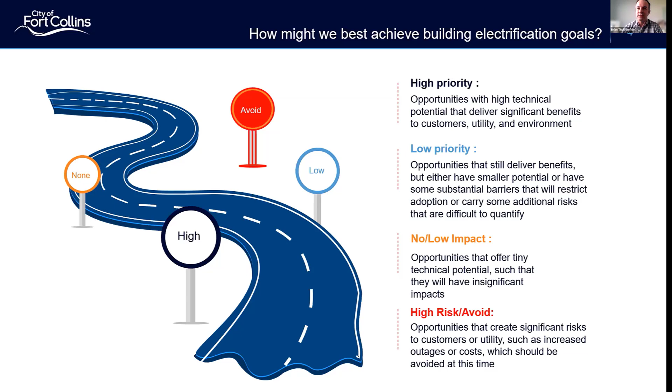I won't steal Justin's thunder much, but in 10 or 15 years we forecast to become a winter peaking utility. We're still summer peaking currently, but how does that change over the years? How does the cost effectiveness of measures get impacted? And what are some of those measures that we want to avoid from that perspective?

So part of the analysis, we cast ahead to 2040 to really look at, in a 100% renewable electricity future, where are our biggest opportunities for GHG reductions? We broke this down into new and existing residential end uses, and through this analysis saw that the biggest bang for our buck is really related to space heating and water heating in the existing building stock. We define that as essentially 2021 and forward being our new building stock.

We're on the IECC 2021 energy code right now, so we have a few other levers to pull when it comes to new construction. However, this framework and this analysis really showed us that we should be focused on electrification measures and programs in our existing building stock.

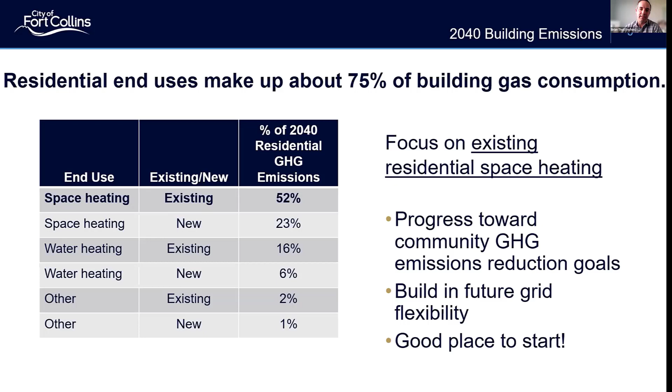This was generally our approach to get us to the place where we want to launch new electrification programs. We did some benchmarking on current electrification programs across the country, and I've learned a lot from our peers along the way. We surveyed our local contractor and customer base on their awareness around heat pumps, and ultimately developed this cost effectiveness framework to help us implement, resulting in some key recommendations for what our program will look like once launched.

I won't focus on the benchmarking initiative related to electrification measures, but before handing it to Justin, I wanted to mention that awareness among contractors was actually higher than we thought. We had a few key contractors that were aware of and did view heat pumps, specifically air source heat pumps, as an opportunity in Fort Collins, and talked about focusing on our customers with solar as a potential target for selling heat pump technology.

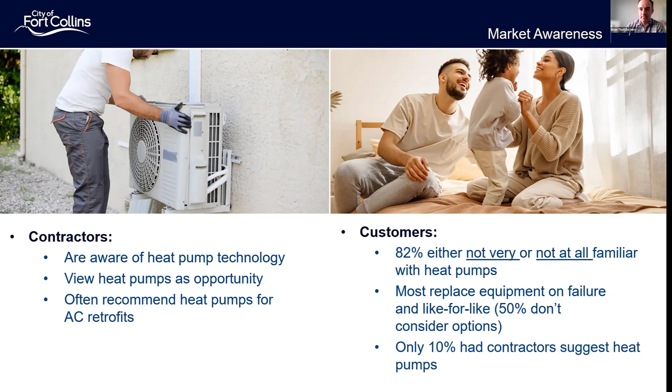Okay, can folks see that okay? Yes. Great. Yep. All right.

As Brian mentioned, this is what we were tasked with: trying to figure out how we might best achieve some of these building electrification goals in Fort Collins. What are we trying to pursue now versus in the future? To do that, we had to try to prioritize different electrification measures.

The problem we had was that building electrification is a little different because electricity consumption increases. We're used to energy efficiency testing where we're always reducing electricity consumption. However, in this case, we're actually going to reduce gas and increase electricity consumption. So some traditional benefit cost approaches just aren't going to work very well in this context.

So the solution we employed was to follow the National Standard Practice Manual guidance for developing a jurisdiction-specific test. We worked with a hand-picked group of stakeholders within the utility to develop this test, and then worked with James at Lumina to develop this JST-compatible, flexible cost effectiveness tool in Analytica, which offers some specific benefits. Here's just a quick overview of this tool.

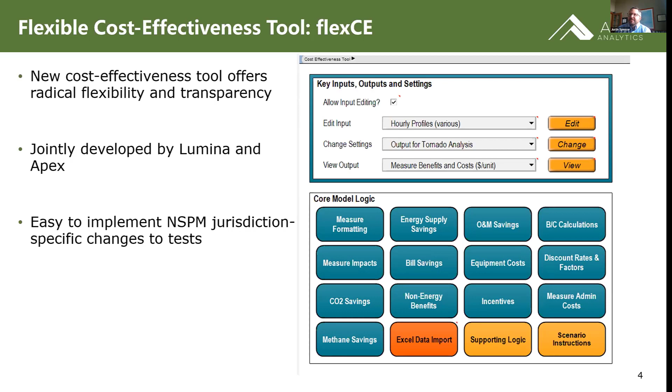In terms of the flexibility, this is an example of how that works. We have this master table within the tool that has all the different cost and benefit streams, and then you can choose for each cost test how to treat it. This was a big plus for us.

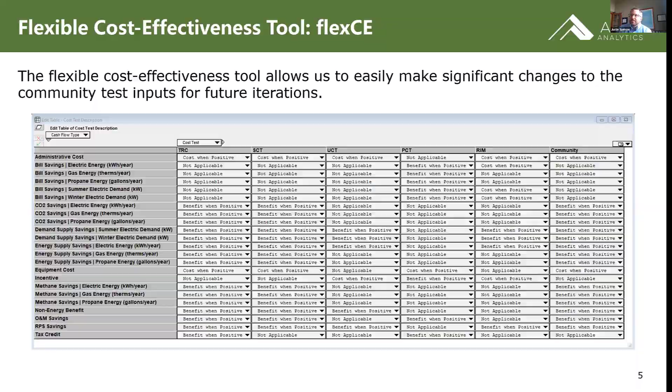First we developed the framework, we developed the tool, then we had to do some modeling of heat pumps, because as Brian brought up earlier, when we looked at the opportunities, it was really all about residential space heating. So I wanted to talk a little bit about heat pump operation and some of what we found there.

For starters, this is a bin analysis of when the loads happen, what temperatures different heating loads occur at in Fort Collins. Fort Collins has a cold, dry, sunny climate in the winter. You actually see the bulk of the heating load happens between 20 and 40 degrees, right in the heart here. Yes, it can get extremely cold, right?

I think the all-time record cold temperature in Fort Collins is 35 below or something like that. It does get to 20 below, once a decade kind of thing, at least in recent years. But as you can see here, the fraction of the heating load actually being delivered below zero is very, very small. That's very rare weather. But when you do get it, you can get a few days in a row where it doesn't even get to zero. Very cold but infrequent. Whereas your typical weather is like a low of 20, high of 50, a sunny day in the winter.

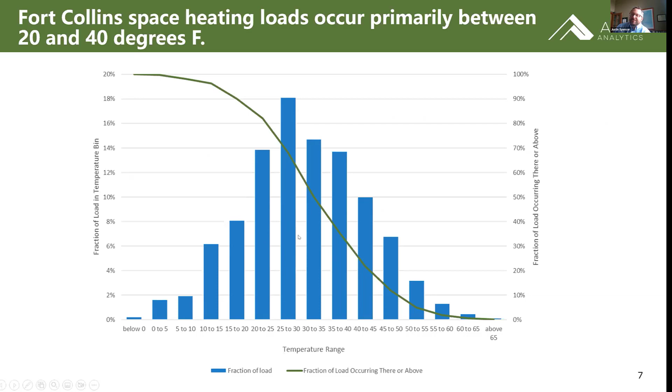So then if we flip back to this distribution here, you can see how influential this is, right? So if I'm heating at all temperatures above 30 degrees, that's about half the load. But then if I'm at all temperatures above 20 degrees, that's another 30%. So now I'm able to meet 80% of the load with the heat pump cost effectively.

All right, do we have any questions yet on any of this? I can't quite see the questions. We're all good. Not yet, Justin. Great. Well, we'll just assume everybody understood all of that. And I explained it perfectly for once.

So then the next really important issue around heat pump operation is just what happens during really cold weather. So how do we keep people warm during extreme cold weather? The problem is the capacity of heat pumps drops off as you get to extremely cold temperatures. So you need some kind of backup, at least in this climate, right? We're a cold climate. One option is to use a hybrid heat pump. So use the existing gas furnace. And you have zero grid impact in that case, right? You have no electric capacity required to meet your heating loads during those times.

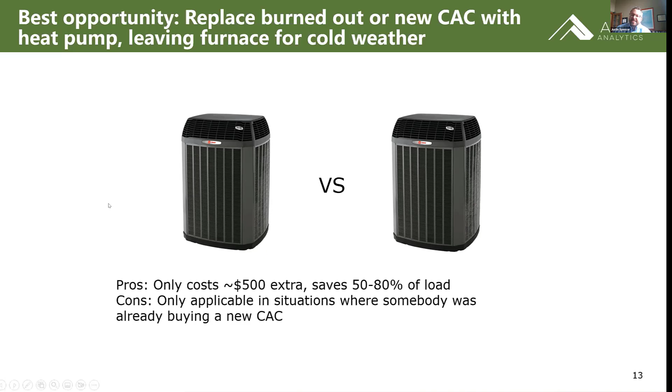So the next key finding, the full displacement with electrification, so going 100% electric, is very expensive for the utility and ratepayers. So as Brian mentioned, we're expecting Fort Collins will become winter peaking sometime in the 2030s, especially as we do more electrification. And each additional kW of winter peak costs around $100 a year to meet with gas combustion turbines even, right? If you're trying to have a carbon-free means of meeting this, it's untold expense. We don't really know what it is, right? You can't actually buy that thing. It's going to be able to provide us with a week of backup.

And so when we bring back that present value of 10 kW of electric resistance backup, we get about $17,000, right? So that's the additional cost of the utility to meet that capacity. And so our conclusion here is just that electric resistance backup heat in this climate, in our situation, is a bad idea, right? So we don't want to encourage that with our rebates. At least that's our recommendation.

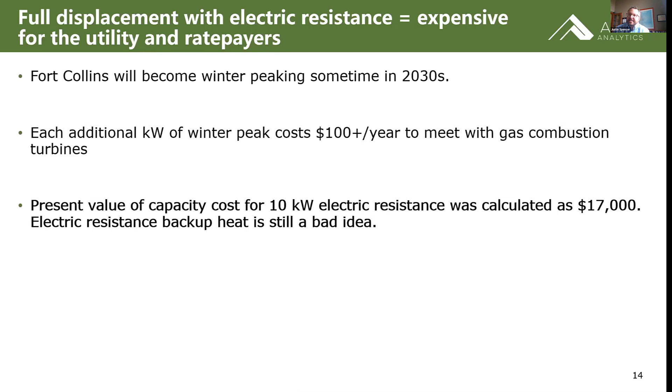Next key finding, so the heat pump cost effectiveness depends strongly on the air conditioning being worth something. So if somebody doesn't have air conditioning to start with and doesn't want to pay anything for air conditioning, it's really hard to make the case, just an economic case, for getting a heat pump, at least here. That might be a little bit different if you have propane, which is even quite a bit more expensive. But in our case, that cooling really has to be worth something. And in our climate, right, we also get temperatures up to 100 degrees in the summer on a regular basis. It gets to 90 like 40 days a year or something. It's a climate where people appreciate having some cooling.

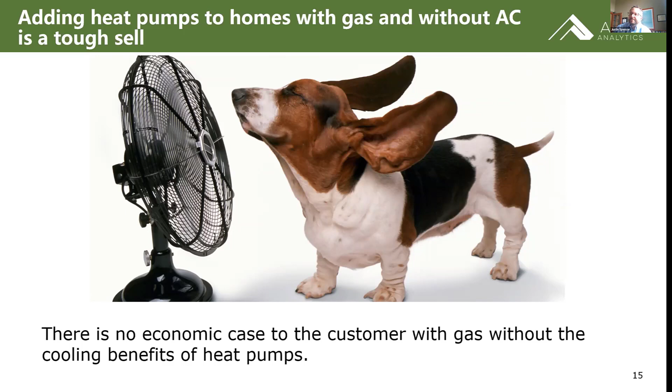And so this is akin to a cold climate heat pump, full variable speed all the time, versus, just say, a high efficiency heat pump, right? And so you can still consider incenting these some, especially with the 100% displacement options, but you're still gonna have to solve that backup heat problem, at least in this climate.

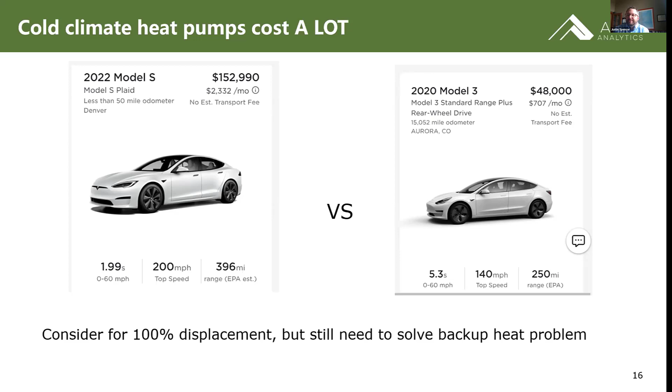So yeah, just a summary of the key findings. We've already been through most of these, right? It's mostly about space heating and water heating in terms of greenhouse gas emissions in the future from buildings. Full electrification adds a bunch of winter peak. We really have to keep electricity prices low relative to gas if heat pumps are going to be cost effective for customers.

We found that the partial displacement measures really looked great. They add a bunch of electricity consumption without adding peak load, which really improves utility load factor, and those benefits can pay for high rebates. So these actually pass the ratepayer test. So if I'm installing a hybrid heat pump that's using gas half the time, electricity half of the time, I'm going to cause downward pressure on rates from this kind of a program.

And then lastly, another question. Sorry to interrupt you. Related to modeling a hybrid heating system where the gas furnace comes on only during colder weather, did the model assume current gas rates, or did it assume the cost of delivering gas to the home would go up because overall gas consumption is going down?

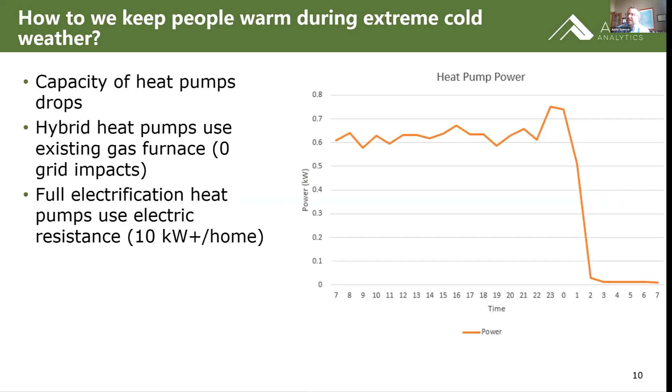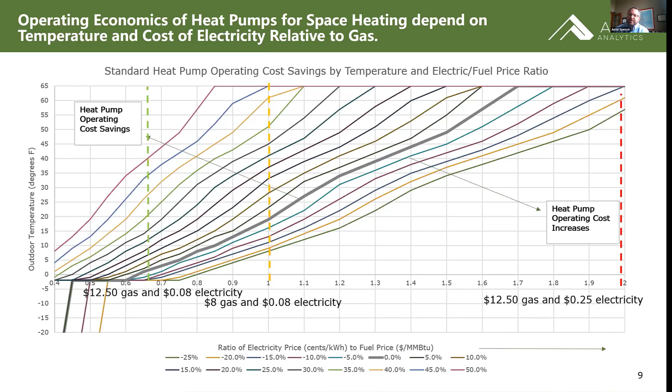So the way we modeled this is we modeled a few different switchover temperatures, and then we looked at the cost effectiveness of those. So if you come back to this plot, you can operate a heat pump any way you want on this plot, right? This is part of why we built something like this: it allowed us to say, well, if gas prices got a lot higher, then this would be effective, versus if they were a lot lower, this would be effective. So in our analysis, we used current gas prices, but we're doing a follow-on now to look at some sensitivities to different prices of gas and electricity.

So right now, our conclusions are based on last year's gas and electricity prices in Fort Collins, and these were our results. Now you wouldn't necessarily get the same exact result someplace else, right? So if you have really high electricity prices, you wouldn't necessarily get that same conclusion, that these partial displacement heat pumps were big winners.

Awesome, thanks. We actually had another question come in. How does fuel switching play into this from a regulatory standpoint? That might actually be a better question for Brian. Okay. Brian, do you want to comment on that from Fort Collins's perspective?

Yeah. So I maybe failed to mention that Xcel Energy is actually the natural gas provider within the city of Fort Collins. We're only the electric provider. And then you're talking about a muni versus an IOU. Xcel Energy certainly has different regulatory requirements, and in Colorado is regulated by the Public Utilities Commission. From an electric standpoint, Fort Collins implements programs essentially at the direction of City Council and the Executive Director of Utilities based on city policies. So from our standpoint, there are no regulatory needs that we need to consider when looking at fuel switching.

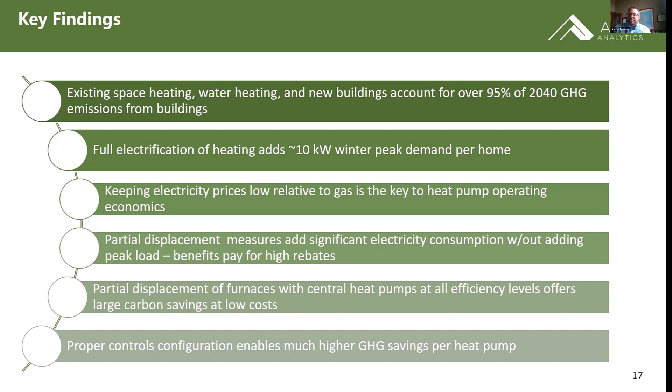We could really get down the rabbit hole there. I want to skip ahead and quickly go through the phased recommendations. I might want to hold questions until we get to the end. I see Rich has a really good one, so we'll get to that in a minute. Okay, sounds good—or maybe he already answered that one. All right, let's chat.

Based on those key findings, what was our recommended way forward? This isn't necessarily how Fort Collins will proceed, just our set of recommendations. Phase 1 is about building market awareness, customer knowledge, and contractor capability. We're trying to answer: what would it take for contractors to almost always install a heat pump instead of an air conditioner? We want that to become standard practice. Our recommendation is to offer contractor training and downstream rebates for all heat pumps, not just cold climate, prioritizing broad-based hybrid solutions—essentially a heat pump for every home.

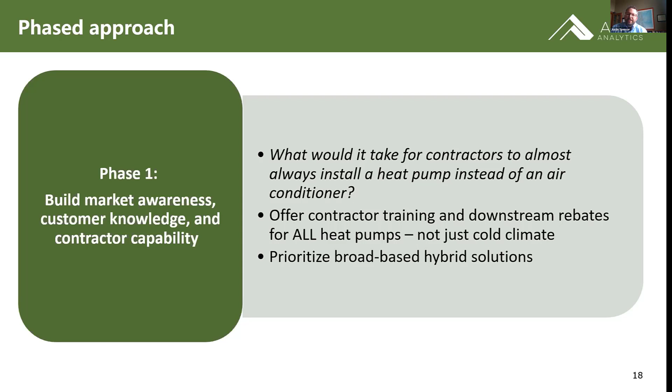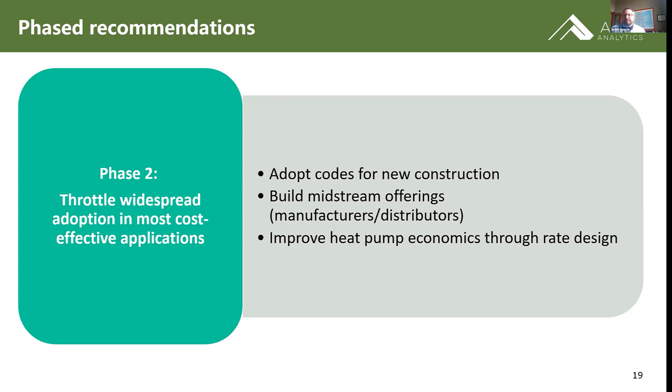Phase 2 is where we open things up to get more widespread adoption. We recommend adopting codes for new construction that require heat pumps, building midstream offerings to incent things at the distribution level, and improving heat pump economics through rate design.

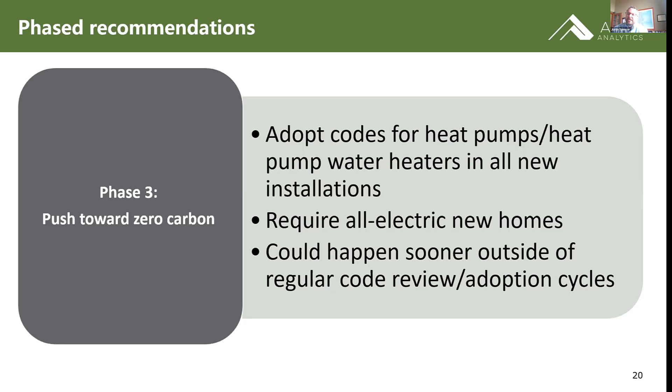Phase 3 is when we drop the hammer—the big sledgehammer that is codes. You adopt codes requiring heat pumps and heat pump water heaters in all new installations, pushing towards zero carbon. This is a ways out and likely requires additional work, so we're not jumping straight there. We recommend this phased approach.

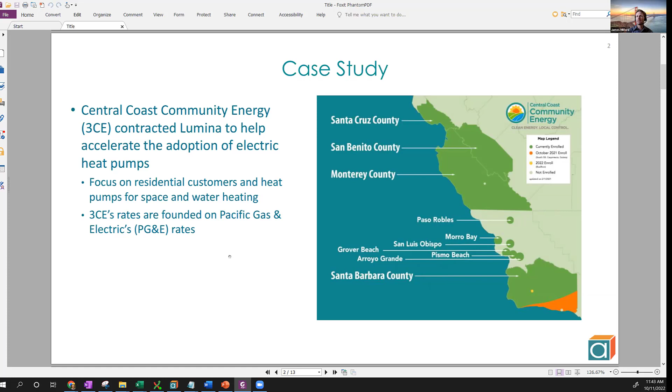Rates are very complex, especially out in this region, and just understanding a utility bill can be very challenging. We wanted to make that completely disappear for the customers of 3CE.

We built all of these complexities into our bill savings estimator, trying to make sure that customers could have a tool that's very easy to use, giving them some of the most accurate results available right now through free online bill savings estimators.

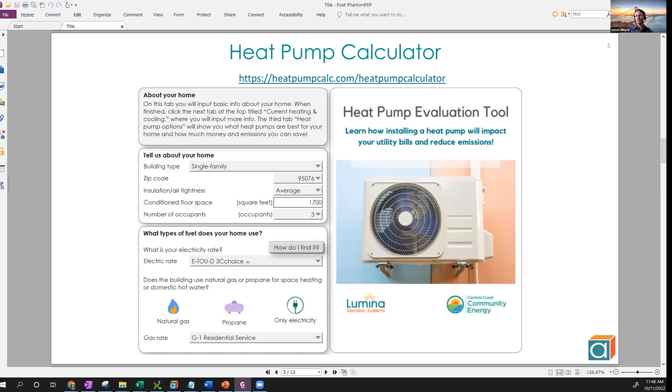And now I'm going to show you just some examples of some of the rich information that is possible using this calculator.

So first we need to talk about why a simplistic back-of-the-envelope calculation isn't necessarily reliable for heat pumps and for these different jurisdictions throughout the US.

From 12 to 4, you're at an off-peak period. From 4 to 9, you go into on-peak, and then back to off-peak after 9 p.m.

In addition to the time of use, there's tiering, which pretty much says that if you're a high consumer of electricity, at the end of the month, the utility looks to see how much monthly consumption you've had, and if you exceed some threshold, you might end up with a price adder—in this case, a 9-cent price adder if you exceeded the monthly allowance.

So these kinds of complexities make it very challenging to come up with an accurate estimate of bill savings if you don't actually account for them.

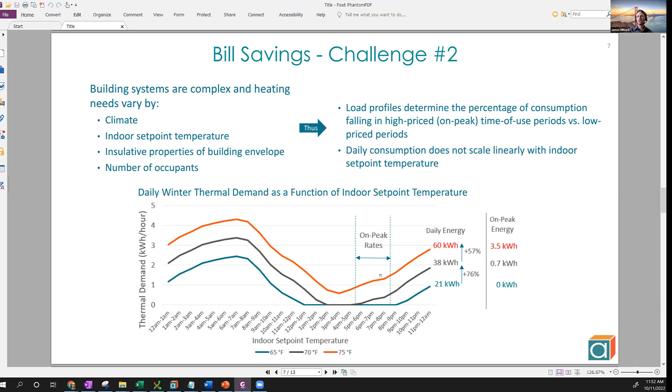Justin's already talked a lot about this, but just the idea that heat pump efficiency changes as a function of the outdoor temperature means you really need to do an analysis on an hourly basis, understanding the outdoor temperature at the times you're running an air source heat pump, to make sure you're appropriately accounting for the efficiency.

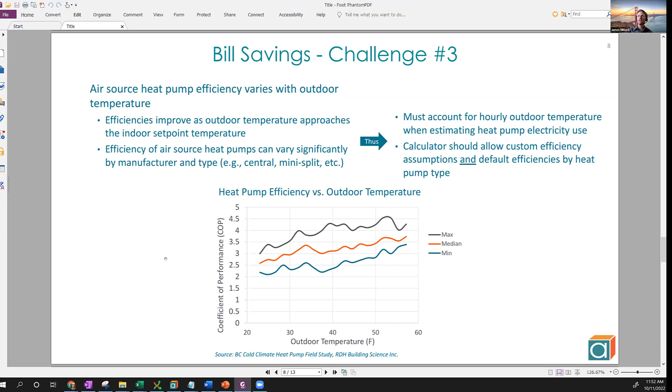So why does all of this matter? If you're a consumer, an HVAC contractor, a utility, or a city, you're looking for the best information possible on what the impacts will be on people's fuel costs or energy costs. In order to make good decisions, simplistic calculators may not be able to provide that for you. It's very likely that a simplistic calculator would result in misleading conclusions.

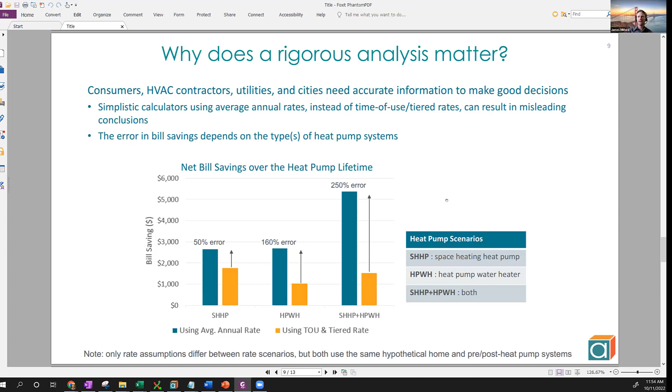For anyone interested in electrification, the last thing you want is a negative reputation from telling somebody they'd save X amount of money when they ended up saving half of that. I think that's something folks in this industry definitely want to avoid. So having tools that can accurately estimate bill savings is going to be very important moving forward.

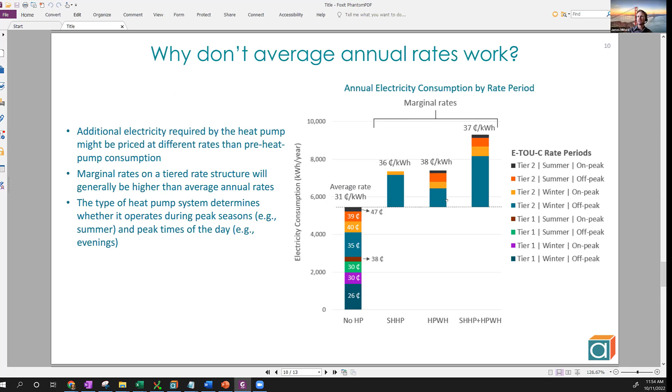For the sake of time, I'm going to skip over this one, it goes into a bit of wonky detail. But I wanted to point out that another benefit of this tool is being able to compare rates. Whether you're a consumer trying to figure out which rate to switch to if you want to electrify, or a utility trying to understand whether your rate structures are conducive or hindering electrification, we can run different scenarios through our estimator.

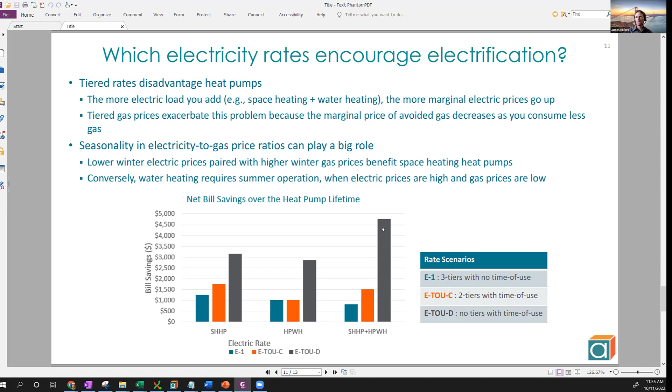Here I'm comparing 3 different rates: one is a 3-tiered electric rate with no time of use, another with 2 tiers and time of use, and the last has no tiers but does have time of use. What you see is that tiering leads to fewer bill savings, while having no tiering gives you some of the highest bill savings. So using this tool, we can understand the different implications of what rate you're on, or what rate structure a utility might want to promote moving forward.

So in summary, we now have this website and bill savings calculator that we've initially focused on Central Coast Community Energy's jurisdiction, but it's in a place where we could easily provide this to jurisdictions across North America, with the hope of providing consumers and HVAC contractors with more information and more accurate bill savings estimates.

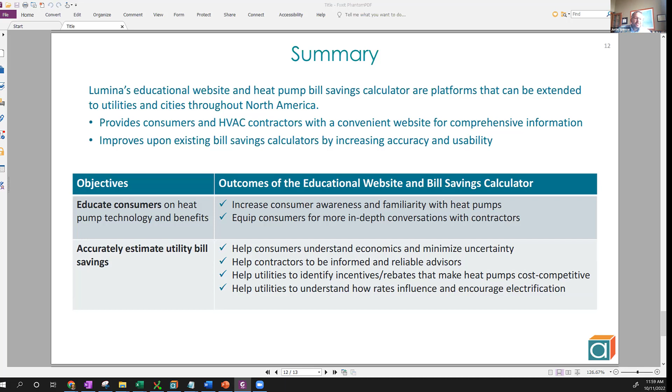Did the model assume no need to modify structure or electrical service panels and circuits when installing heat pumps? So for the hybrid heat pumps, we made that assumption. There's no need to modify anything because your baseline is an air conditioner, so the baseline stays the same. We did look at some options of including additional prices for service upgrades if you're going all electric. We didn't show any of those results, but we did look at those, and that does make things harder for the full electrification. Adds an extra couple thousand dollars per premise.

Yeah, understandable. We have a question. This is for James. So the Lumina calculator is not available yet for utilities other than the Central Coast. Do you want to kind of speak to the availability on the heat pump calculator tool?

Yeah, so we completed the heat pump calculator tool this year, and the Central Coast Community Energy was the first utility to reach out to us. We're hoping to continue to expand the usage. I think it's a valuable tool, and realistically, from our perspective, it's pretty easy to update it for other jurisdictions. It just requires climate zone information, putting in new gas and electric rates, and kind of looking at the demographics, if you will, of the building stock and understanding what consumption looks like for an average or typical building.